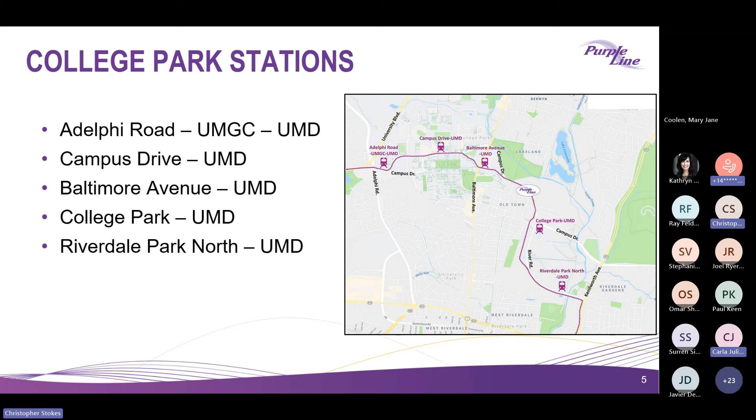We'll turn it over to Ray to go. All right, thank you, Carla. And welcome everyone again to our CAT meeting this evening. We're so glad you're able to join us this evening. It was definitely a busy summer for us here at the Purple Line. So now let's take a look at our latest progress video highlighting some of that progress. Chris, let's turn on the video.

Welcome to our Fall Progress Update video for 2024. We are here on Campus Drive at the University of Maryland, where we recently completed a lot of our summer construction work that completed the track installation all along Campus Drive. We are so excited that we have 5 light rail vehicles at our operations and maintenance facility, and we also completed 10 miles of track across the alignment.

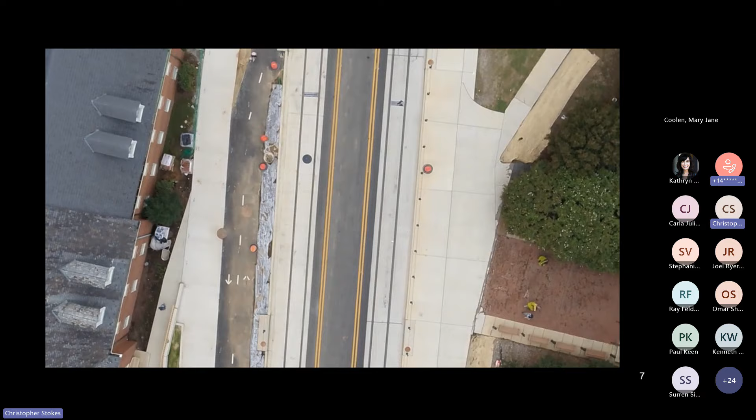Did I also mention that we have over 17 miles of sidewalk that have been installed? Additionally, you can see the colorful canopies that are right behind me, and we have 19 stations that will be in construction by the end of this year. And we are so excited that we are moving forward, completing the momentum on the project, and continuing that going forward.

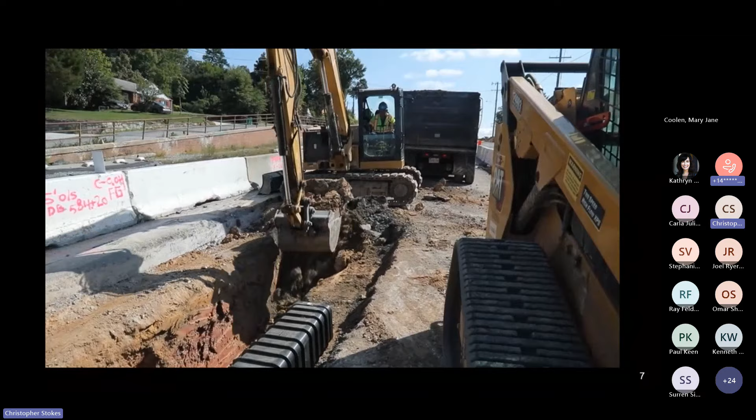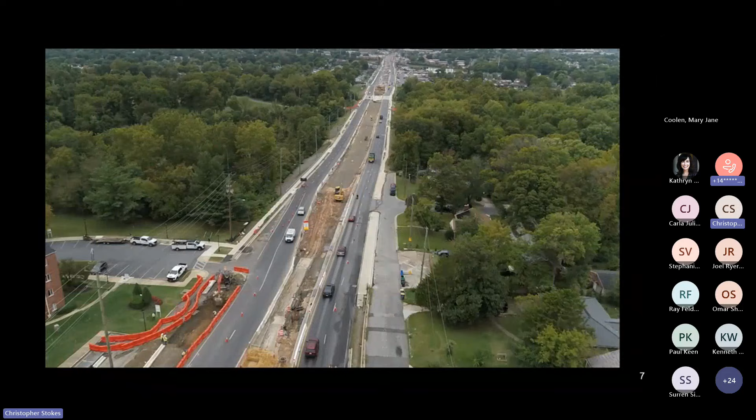Purple Line crews have focused on many specific areas to minimize impacts and advance the project. In Prince George's County, crews prepare for track placement by establishing work zones in the center of University Boulevard. Traffic is shifted to the newly completed sections on either side of the road.

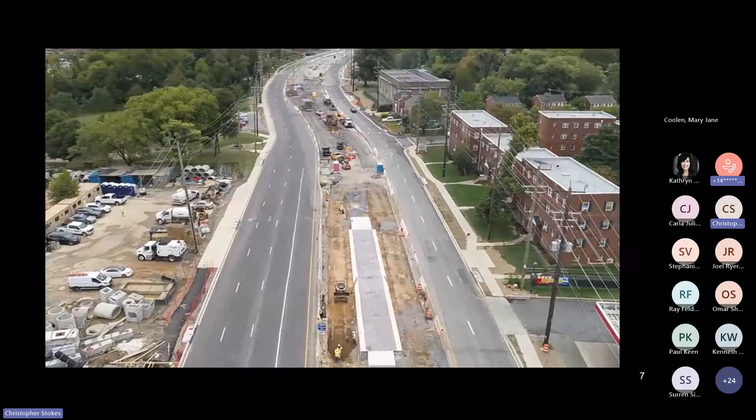At the University of Maryland, crews have successfully completed much of the heavy construction through the center of campus. This year, students arrived to find newly completed sidewalks, embedded tracks, paved roadways, and all lanes open on Campus Drive.

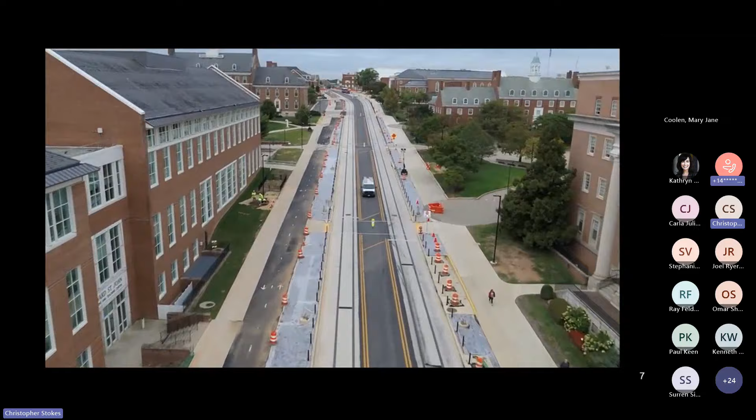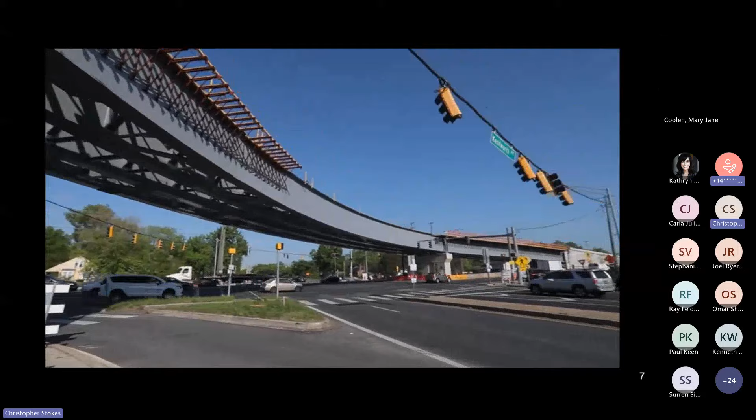Also in Prince George's County, crews opened 2 new roads, 64th Avenue and Mustang Drive. Both connect communities to Riverdale Road at signalized intersections. The flyover bridge from Kenilworth Avenue over East-West Highway has also been completed. Track crews completed the crossing of River Tech Court and opened the road 3 weeks ahead of schedule.

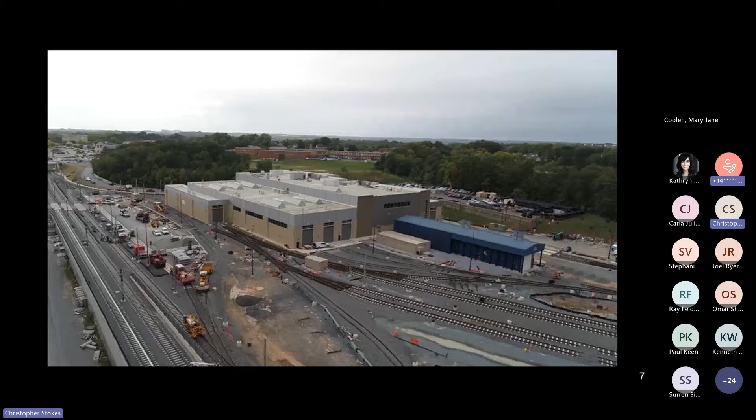At the Operations and Maintenance Facility, the new light rail vehicles are being prepared for testing. I am honored and thrilled to stand here today at our Operations and Maintenance Facility in front of this. Maryland, we have a train.

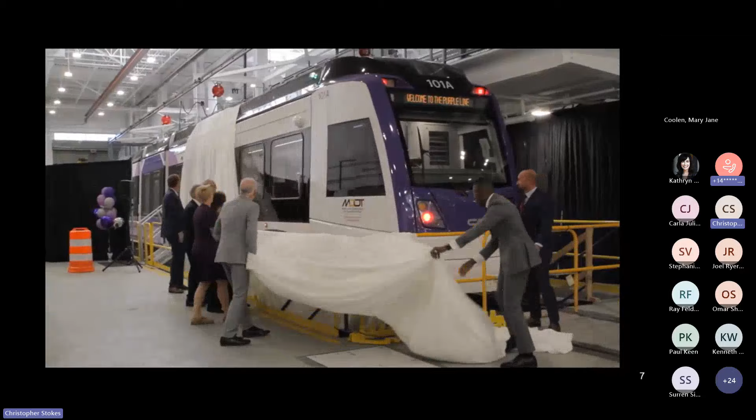Good morning, I'm Holly Arnold, Administrator of the MTA, and I am so thrilled to be here today to celebrate the arrival of the first of the Purple Line light rail vehicles.

I want to give huge congratulations to the Purple Line team. This team does not sleep. They are working all the time to deliver the Purple Line for Maryland, and I'm so thankful and grateful for them.

These vehicles are 142 feet long, that's nearly half of a football field, almost twice the size of a metro vehicle, and will be the longest light rail in North America. It'll hold up to 430 passengers. There will be 8 bike racks on board, as well as 8 dedicated wheelchair spaces accessible near the doors. These electric-powered LRVs will reduce energy and carbon emissions, as well as being quieter than other modes of transportation.

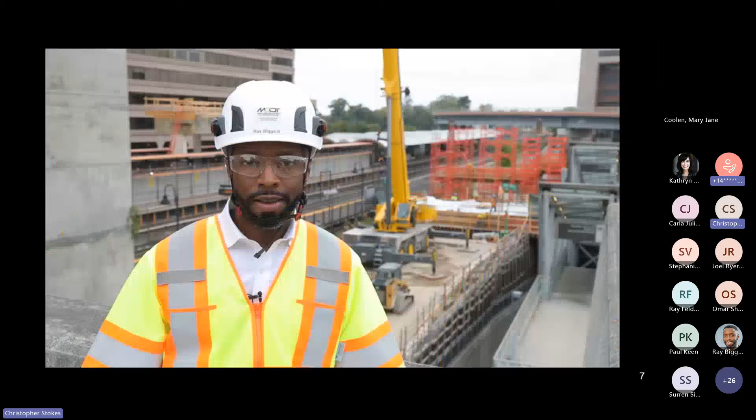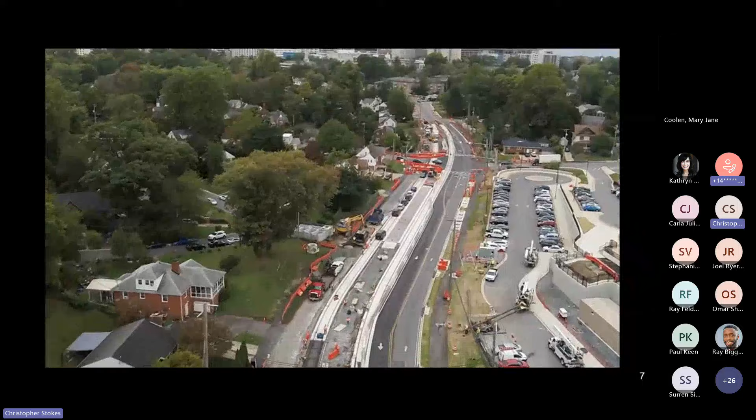Over the summer, we worked very closely with our partners at CSX, WMATA, Montgomery County Parks, and Montgomery County Schools to complete a lot of construction work and installing track all across the alignment. In Montgomery County, the Purple Line has successfully placed both sets of tracks across the Wayne Avenue and Dale Drive intersection prior to the start of the school year.

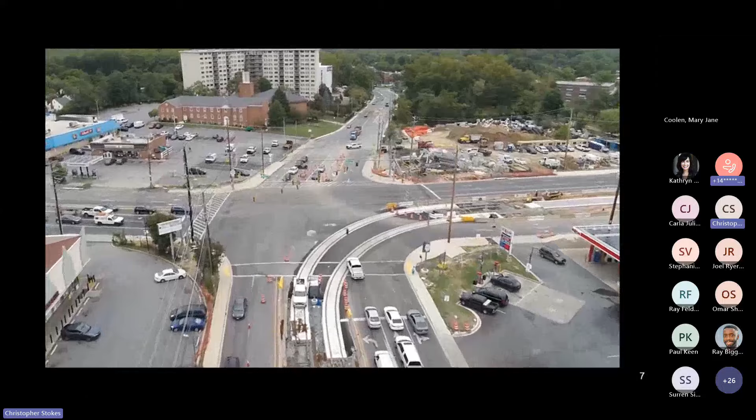They have also installed the complex curved track at Piney Branch Road and University Boulevard, and fully opened the Talbot Avenue Bridge.

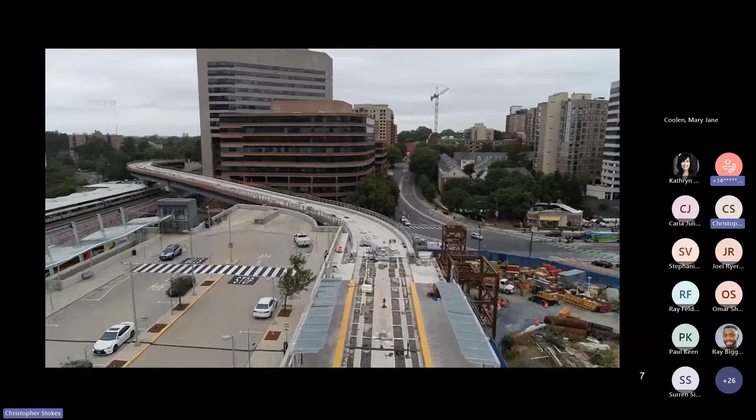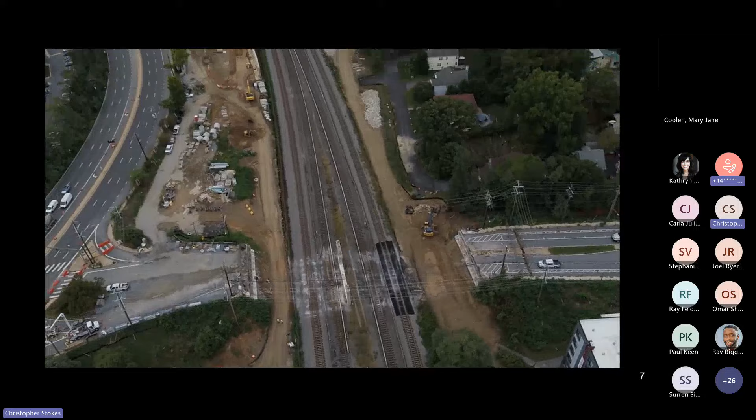At the Silver Spring Transit Center, the LRV bridge over Colesville Road and the foundations and superstructure for the new mezzanine are taking shape. Crews also started the work to build a new and improved Spring Street Bridge by completing the bridge demolition during the WMATA summer shutdown.

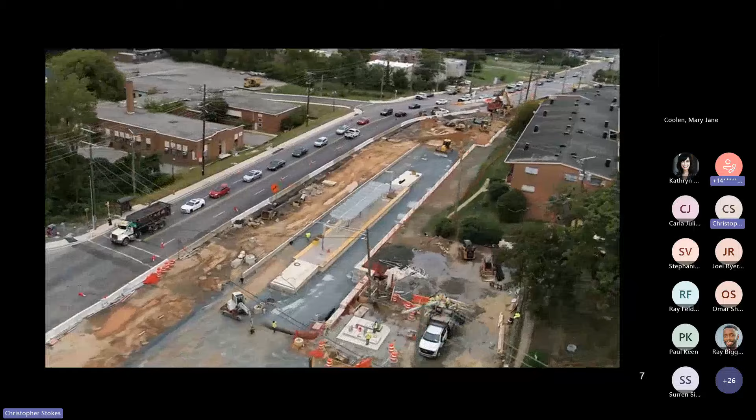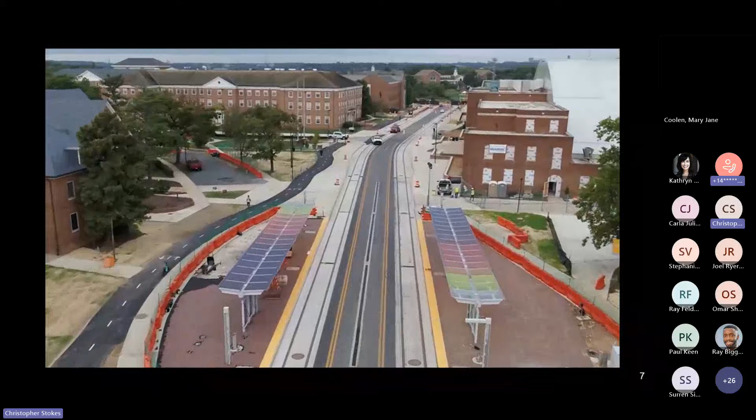Station construction can be seen across the whole alignment, with station after station taking shape. The highlight of the station construction is the installation of the first Art in Transit artwork element at the Campus Drive UMD station. The artists at Legge Lewis Legge added a beautiful display of color that changes throughout the day and is a shining example of things to come at the Purple Line.

Thank you again for your patience, and while we continue construction, we are going to keep the momentum up across the alignment, moving from laying track into the testing phase of the light rail vehicles across the alignment. We are so excited about the Purple Line, and we know you are too. Thank you.

Thank you again, everyone. Hopefully you could see all of the progress that we made over the summer. A lot of work, in particular in the College Park area, where we got a lot done with that summer shutdown on Campus Drive.

As you can see in the lower picture, lower right corner, you see the canopies that got installed, highlighting some of the Art in Transit that we have across the alignment.

This is the project timeline. We are still on track, moving forward towards revenue service. The next milestone that we'll be reaching is the dynamic testing of our light rail vehicles.

As you can see in the bottom left-hand corner, we have several of those vehicles in our operation and maintenance facility. In fact, we have 5 now of the 28 that are up in Elmira down here in Maryland. And if you look at the second picture, you'll see the overhead catenary system being installed along Veterans Parkway. Take some time to go along that parkway, and you'll see where we'll be doing the testing once we begin that part.

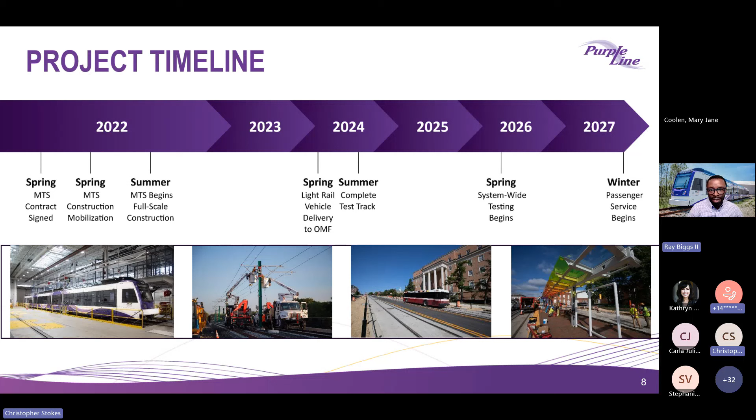Hello, everyone. Thanks for joining. As Ray was explaining before, this has been a busy summer and a very productive summer as well within the past months. So we're going to start by explaining the Adelphi intersection with University Boulevard.

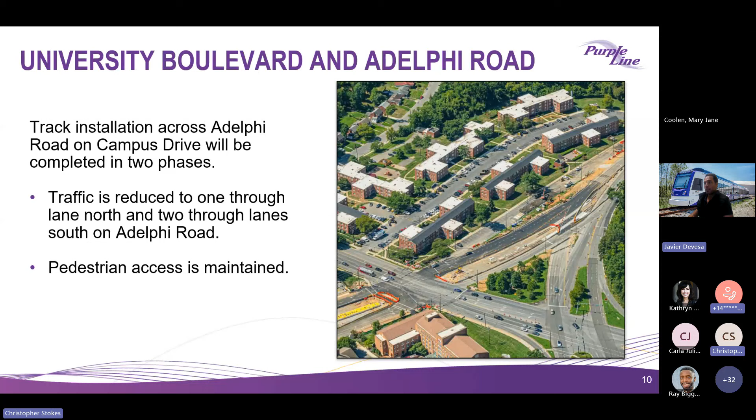There's been phase 4B, which we call the final configuration of traffic, already deployed in the area. As you can see in this picture, traffic has been pushed to the south side through Campus Drive, entering east of Adelphi, and pedestrian access has been fully maintained on the south side.

This is the first summer shutdown that we called in this area, in the UMGC area. There's been massive work completed in these previous months within a time frame that was very reduced.

The first accomplishment was track 1 and 2 in this curve between Campus Drive and Presidential, the section you can see in the top left corner of the picture. All the work related to storm drain, the different conduits, and the station platform was accomplished in order to open the road on August 20th in both westbound and eastbound. Here in the picture, you can see the final configuration of traffic in these two bounds, and all that work was completed previously.

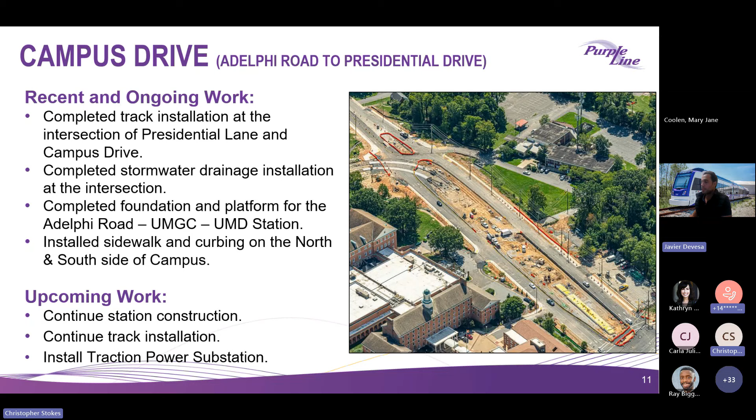Coming up, there's ongoing work at the station. We've currently installed the canopies and already poured the platform and both ramps of the station. There's just some ongoing work around the station that needs to be completed. You're going to see some movement into the track from where we left off in previous months, connecting into the station with some ballasted track. The final major piece of work is the TPSS Q5, the traction power substation on the south side of this picture, which is going to be installed next week.

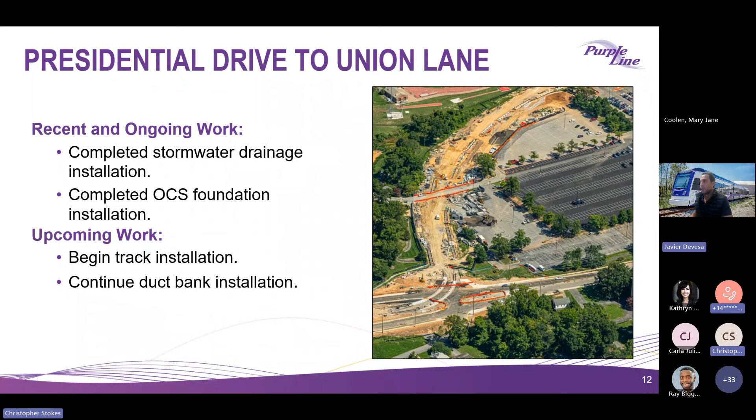Moving inside the core of campus, Presidential, that's an area we're actively working on right now. We're going to be working on all the earthworks and separation for tracks 1 and 2. The positive thing about this area is that we can work in a single phase, so we don't have to split traffic into different phases or configurations. Currently we are working on all the prep work for the track installation, which is going to start in the following weeks, and we're completing the duct bank installation at the top corner of this picture, with just some conduit fitting pending.

Core of campus - that was the major challenge for this summer. The Campus Drive station was completed. There was a ton of work completed in this area, first related to all the conduits underneath the surface, because what you see in the picture is just the result of all this work, but underneath it's been an incredible amount of work across different scopes.

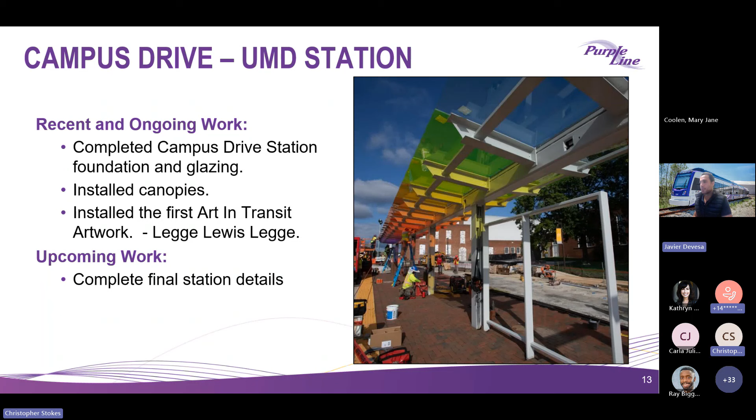Pavers were completed at this station. All the glazing was completed. The canopies were completed, along with all the different systems. Right now we're just touching base with the final portions of the work in both north and south, but everything is pretty much in completion.

This is a nice picture of the final result of the traffic. In this summer shutdown, we basically shut down the whole Campus Drive, as you probably know, between the Regents intersection up to Alumni Drive, so we could finish track 1. Track 2 was the north part, and track 1 was the south part of the track that we needed to complete. So track 1 was completed along with track 2, which was previously completed back in winter, so we could open the roadway.

In addition to the roadway, there was completion of the rest of the flat work on the south side, which was done in small pieces, so all the work had to be fully coordinated, although it was fully closed to traffic. In addition, the last portion was the bike path, which you can see with the final pavement completed from Alumni Drive to the Regents. It's already been opened to traffic, so basically the whole section from Alumni Drive to Regents was open at the end of the summer shutdown to vehicles, pedestrian traffic, and bikes as well.

At the Regents intersection, we completed all the pavement surface. There were different phasings for this work, but it needed to be completed in only one stage so we could reopen it to traffic. That was a key part of the work that was completed, so everything along Campus and Regents could be open to traffic.

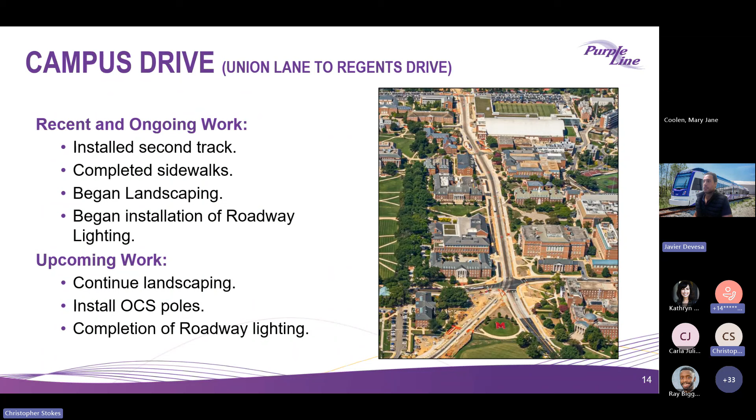East of Regents, that portion was part of the summer shutdown. What you can see on the north side of this picture is both tracks 1 and 2 being completed. That was the objective for this summer, up to what we call the Armory path, which is the connector connecting parking C1 with the Armory building.

Both tracks were completed, and here in this picture you'll see the flowers, but we currently have already completed north and south sidewalks that will be open shortly for the public. We're also going to be working on the bike path on the south side so we can connect the portion of the bike path that was open up to Regents with Baltimore Avenue.

There's upcoming work we intend to do in the following months. Currently, the most active work area is west of Baltimore Avenue. We still need to finish one junction box, a storm drain structure, that will connect all the storm drain up to Baltimore Avenue, and then we'll continue with tracks 1 and 2 up to this roadway.

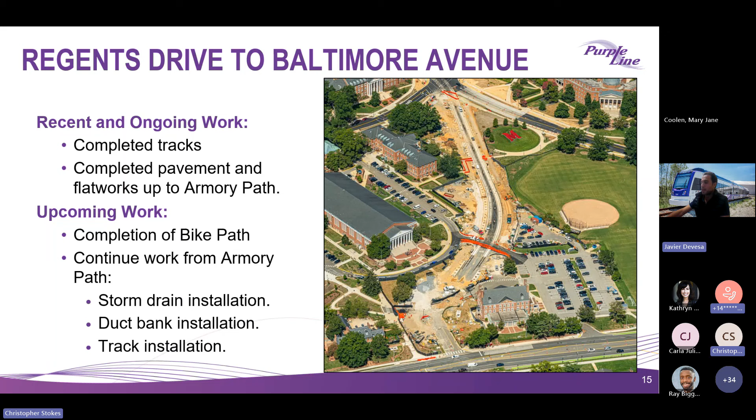Baltimore Avenue is going to be challenging because this is an active intersection with live traffic that we need to maintain. There's going to be different phasings that we'll be working through in the next weeks and months. We have phase 1 and phase 2.

We're going to try to work with some MOT lane closures during the day and most likely at night as well, to expedite the works that are the predecessor for the tracks. So most likely there's going to be storm drain and conduit work installed with lane closures while we keep traffic active in this intersection.

Then track 1 and track 2 are going to be installed in these two different phases for traffic, so we can connect the two sides of Rossborough Lane at both the east and west sides of Baltimore Avenue. Pedestrians will have some effects, but we'll always keep north and south bounds open, whether on the east crosswalk or the west crosswalk.

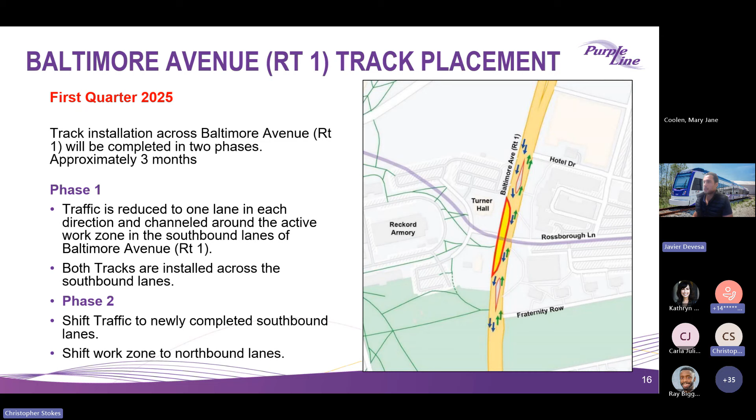We're currently working from Diamondback to the west, on the portion of Baltimore Avenue and Diamondback. We're actively working on different scopes, including OCS, excavation, storm drain, and getting everything ready for the tracks.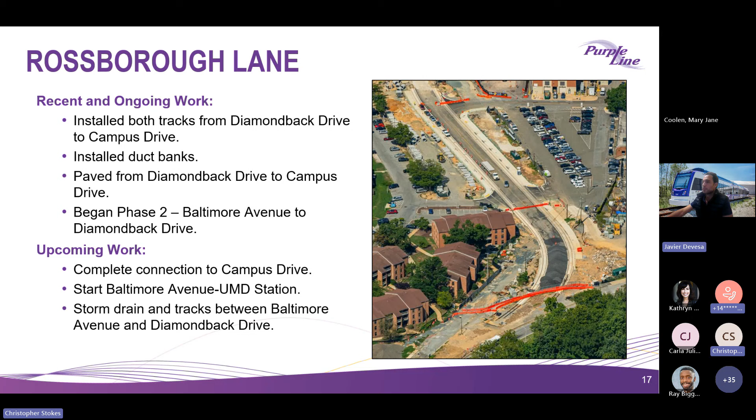On the south portion of this picture, we've already started working on track 1, the south portion of the track, with our subcontractors, so they can move all the way to the east. There's going to be active work that I'll explain on the next page, but that's all connecting to Rossborough Lane.

Here's a picture about what I was mentioning before. All this active work area you can see in this picture is currently being worked on with track 1. We intend to finish track 1 by the end of the year and shift to phase 2, which means putting the traffic on the north side, putting the work on the north side, and opening traffic on the south side.

In order to do so, we have to finish track 1. We're going to open the flat works and sidewalks for pedestrians on the south side, and make sure everything is in good shape to open traffic on this south side.

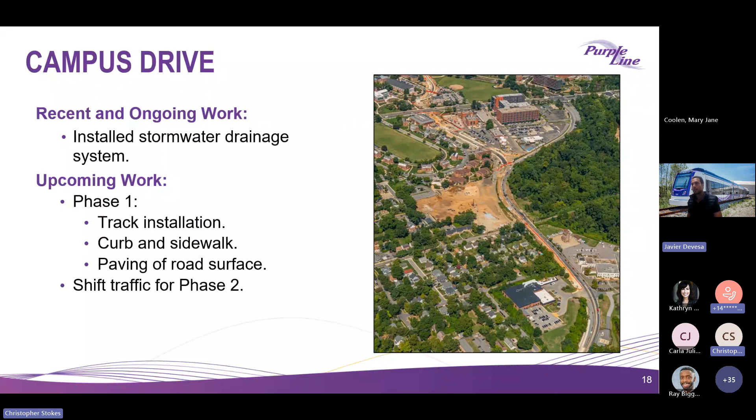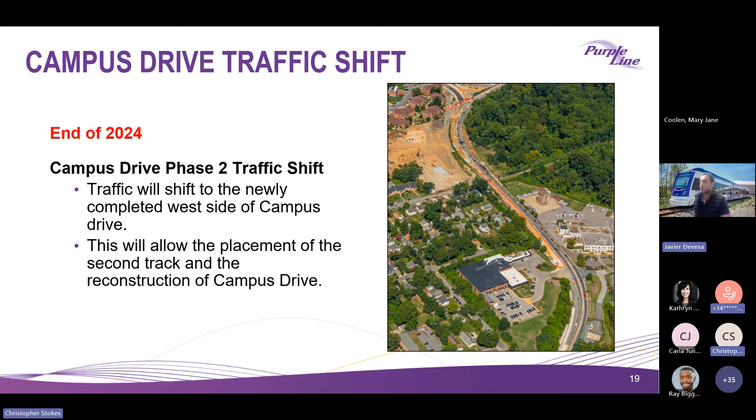This College Park intersection, as we call it, involves some agreement we made with different entities, and I want to give thanks to them for that.

We need to build the track into some pre-curved package, which means we cannot cut it into small pieces. So we need to entirely build track 1 and track 2. In order to do so, we're going to apply some closure into this section for a certain period of time, with a winter break to try to minimize as much as possible the effect on vehicles and pedestrians.

In order to do so, we're going to keep traffic at all times in Campus Drive. At some point, we will do this with some flagging operation, but most of the intersection is going to be completed with this configuration.

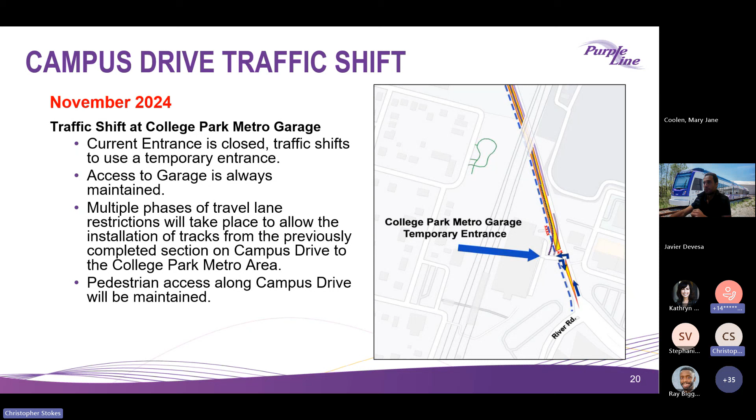And for College Park station, there's been progressive work on the direct fixation. That's been the portion of the work from this parking garage of WMATA up to the next station, the College Park station. There's been progress on the walls, progress on this direct fixation, and it's intended to be completed in the next months.

And for the rest of the area, there's going to be also some progress in the flat works. We're going to try to finish all the area in front of the WMATA area, and also connect the last portion of the duct bank so we can connect everything for the rest of the segment.

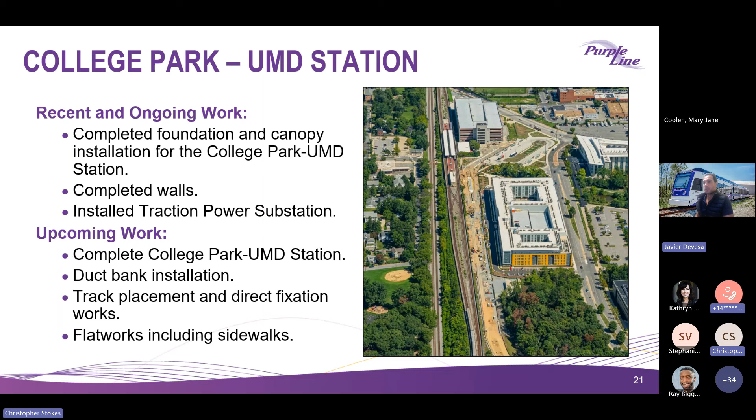In River Road, there were a lot of improvements into all these intersections for Haig Drive. So we're going to continue working there with the rest of the scopes in the next weeks in order so we can make all the track work preparation so we can continue with our steps.

There's been progressive work into this intersection, and we think that everything was completed properly. There's going to be some upcoming work set on the tracks and some other scopes with the different flat works as well, and the different works related to the intersection.

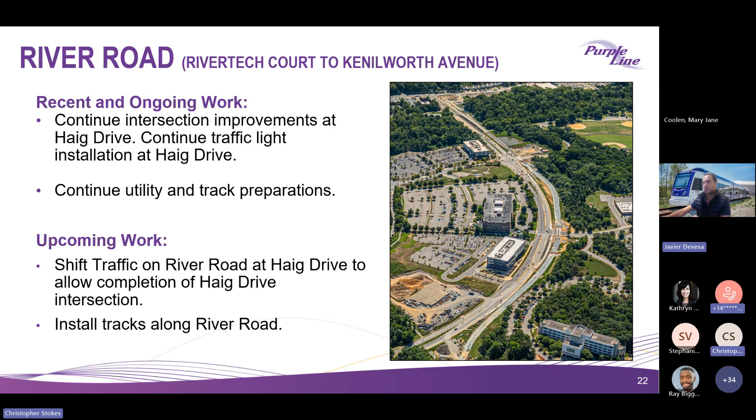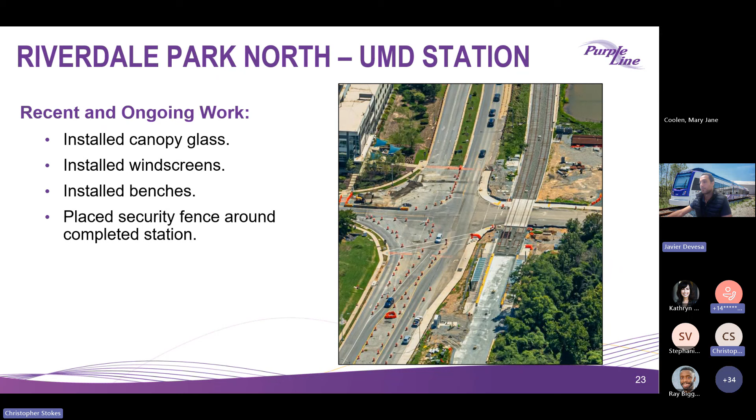For the Riverdale Park North Station, you guys can see pretty much the final product of the station. The canopies were installed with the glass as well as the windscreens. Everything has been protected with some fencing, so you can see a little bit outside the fence the final product, but we make sure that everything is properly secured for all pedestrians. All the platforms have been completed, including some benches, just a final touch of the station, but everything is into the final configuration.

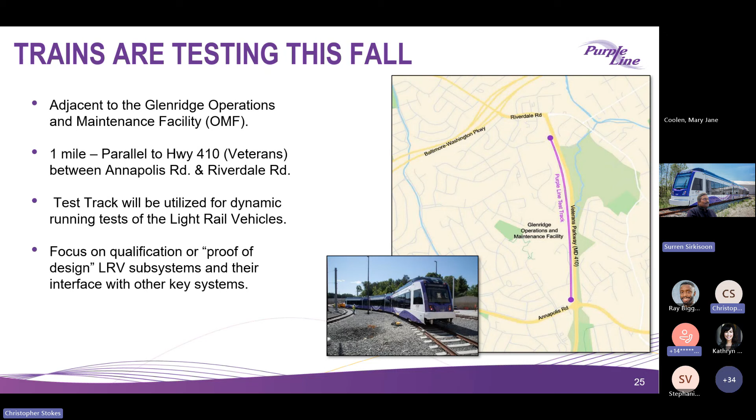Essentially, all of the construction work that Javier just described, at the end of the day, it's going to have to carry a train with many complex systems in a safe and efficient manner. So we start off later, towards the end of the year this fall, with basic tests with the LRVs: braking, propulsion, some of the safety systems like the passenger emergency intercom, the automatic vehicle location systems, CCTV — essential systems for safety.

And passenger comfort. We've conducted training in preparation of utilizing the test track. LRV operators have been trained. We've trained first responders, fire departments and police from the surrounding areas in the event that there's an incident and they needed to respond to that. They've been trained on safely approaching the LRVs, opening the doors, lowering the pantographs — everything required to handle the emergency should that happen.

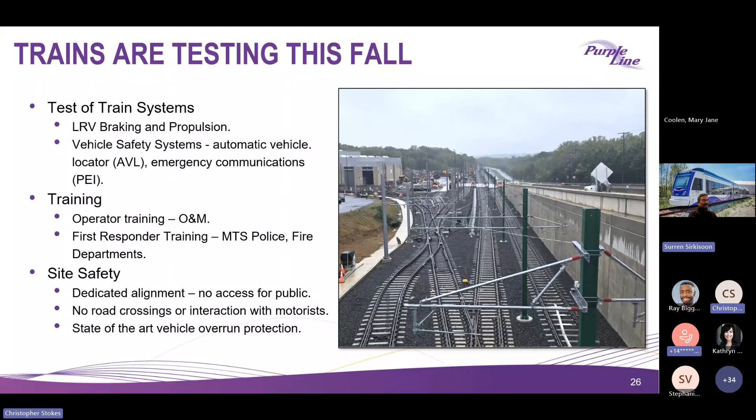Site safety — this is a dedicated alignment. The test track was strategically chosen because it's a dedicated part of the project with no access for the public. There are no road crossings. As I mentioned, we stopped short of Annapolis and the intersection on our west side. We've employed, and we're working with Siemens, our train control provider, to establish state-of-the-art protection for train overrun. So safety is paramount in every aspect of what we're doing, including testing of the trains.

Just previous slide, please.

Just to give the status of where we are with the test track: the tracks have been built. We've got 5 LRVs delivered, and we've been static testing those LRVs, essentially testing all of the systems on the LRVs to make sure that they're ready to run on the test track. We have more LRVs planned to arrive at the site this year.

Tracks are built and tamped. Currently we have inspection and testing of those tracks to make sure that they're suitable for use. That's in progress. The system that will power the tracks, the substation, and the overhead catenary has been built.

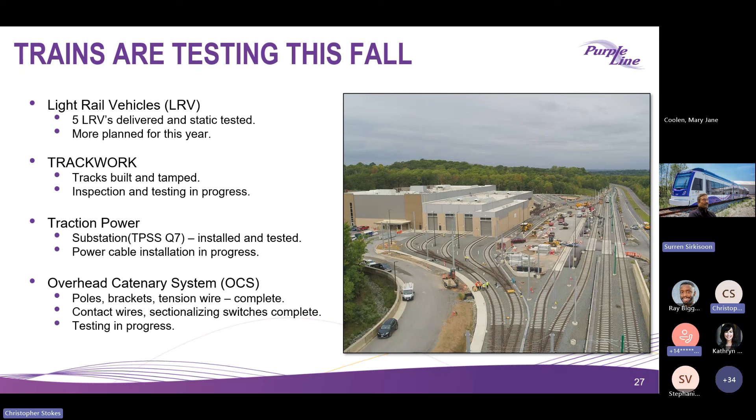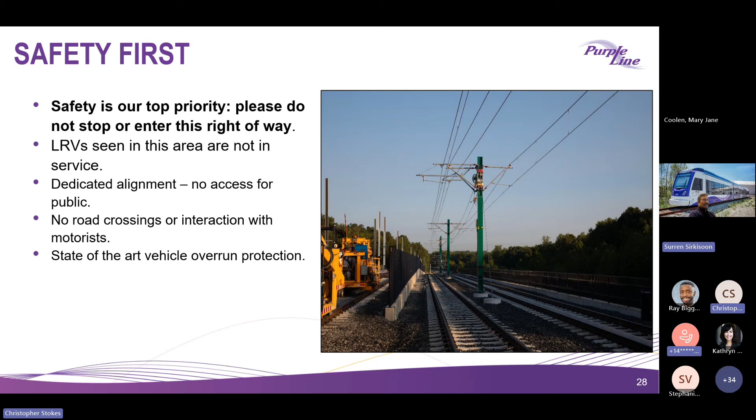I want to emphasize safety. As I mentioned earlier, the test track was selected primarily because it's away from the public, so there is no public access. We encourage everyone to stay away from the test track, certainly not to enter the right of way while we're running trains. The LRVs will be seen in this area, and we've taken adequate safety precautions to ensure that the public understands and knows that we're going to be running trains there, and to keep the area safe. There are no road crossings, and state-of-the-art protection is in place to prevent trains from overrunning the tracks and fouling any of the intersections.

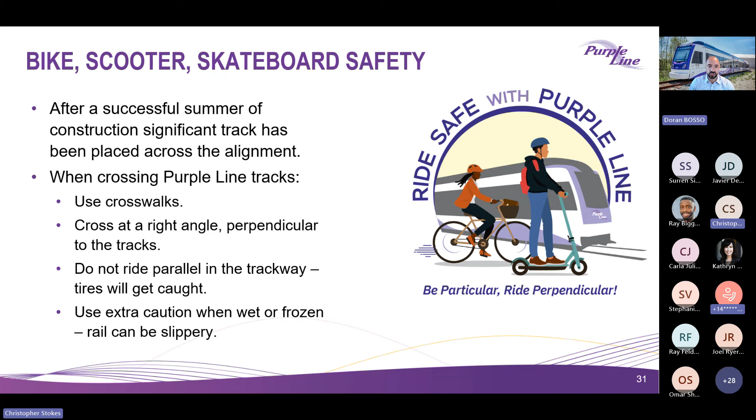I also have the pleasure to talk about our Beyond the Rails community grant program. This summer, Purple Line Transit Partners awarded 6 community grants to nonprofit organizations along the alignment who are doing good work. It's really great to participate with these groups. One example this year was the Beacon Heights group and their National Night Out there in Beacon Heights. We're really happy to contribute to a vibrant community along the alignment.

This is also your reminder that there is another round of community grants, and we're taking applications until November 30th for the next round of 6 grants. You can find everything you need on the website, purplelinemd.com, under the resources tab. There's also an email there, grants@purplelinepartners.com, if you have any questions or need any help. It's a fairly short application process, and we really look forward to receiving more grant applications by November 30th.